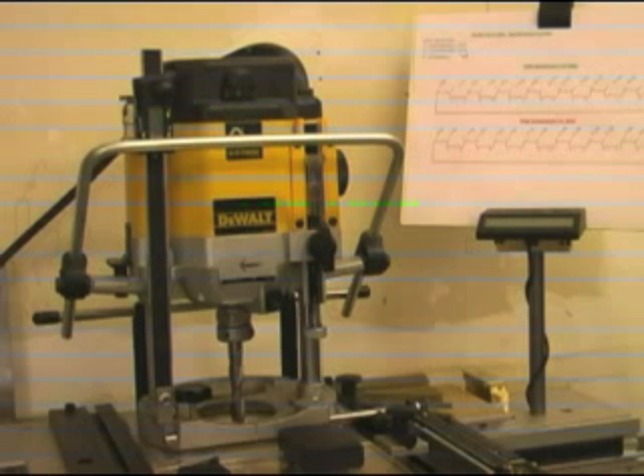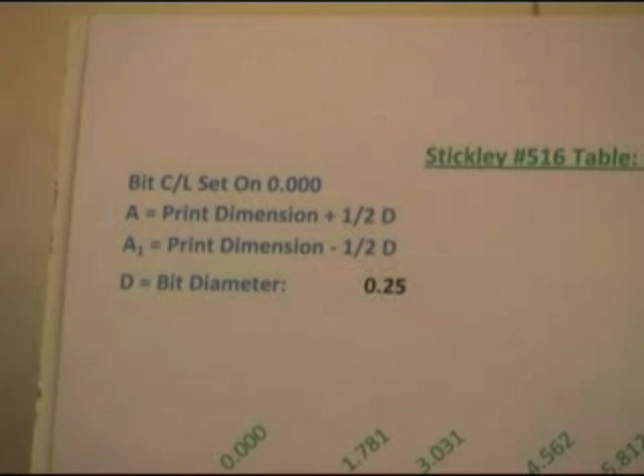Well, as you can see, I've modified my router boss. I've raised the DRO up to my eye level, and I've made a place for a homemade clipboard to set. My plan has two sections, a green section which is my DRO measurements and a red section which are my print measurements. I'm mostly interested in the green DRO dimensions when I'm cutting my mortises.

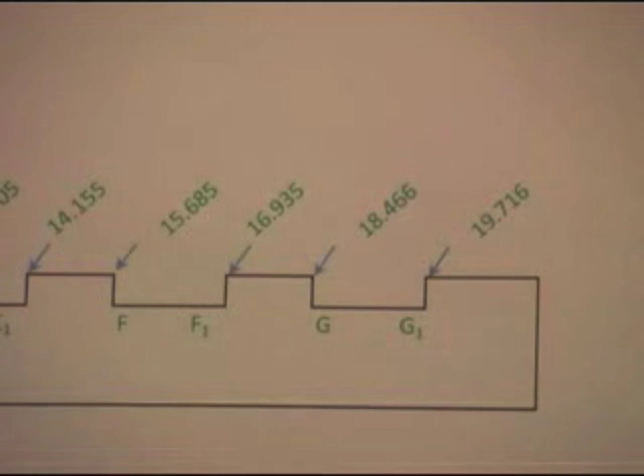If I want to check that they're in the right place, I'll verify them against the red dimensions. As you can see from the upper print here, the mortise that begins at letter F starts at 15.685 on the DRO and ends at 16.935 at F sub 1. That's what I'll use to cut my mortise. I can verify it then with my print dimensions and see whether or not I actually have the mortise in the place that the print calls for.

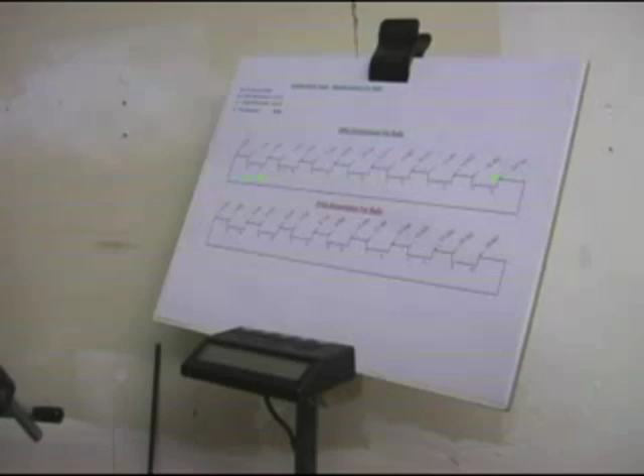So now that I'm all set up, we're going to talk a little bit about mounting the work to the router boss. As you can see here, we're looking at the mortise table, and the clamp is partially disassembled because I want to show you that I use a star washer, one of those jagged little washers, between my knob and the aluminum clamp. What that does is prevent slippage when I lock it down.

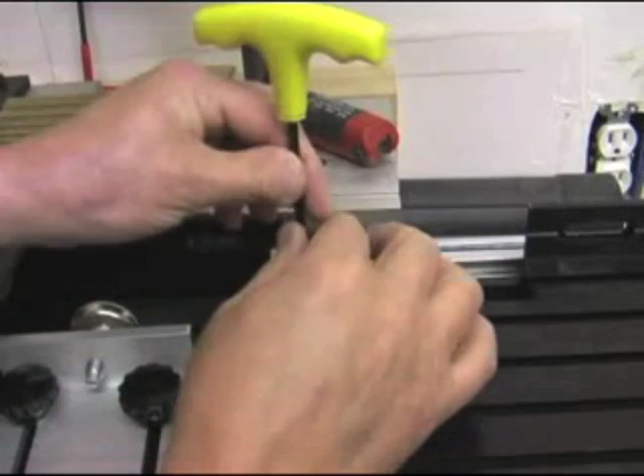Now I've also got the shop-made stop that I showed you in the tenoning video, and I'm going to use it to provide a stop for the rail that I'm going to be cutting mortises in. I've set the stop so that it's going to position the workpiece where there's a solid spine behind it. I don't want to put it over the open area and clamp it there because I'd be pushing against empty space. So I can slide my rail in, as you see, and it will bump quite securely against my stop.

Again, the back rail gives full support to it when I push my aluminum clamp up and put pressure against it. So I'll orient this so that it's somewhere towards this end of the rail, and then I'm going to lock those knobs down, and the little star washer that I showed you is going to keep it from slipping now that I'm going to put a screwdriver on that clamp and apply a little pressure. If that weren't there, you'd probably notice that your clamp will slip and slide backwards. The star washer is going to prevent that.

So I've got the rail in there and I'm holding it down in place and screwing the clamp securely. Now I'm going to traverse the mortise table so that I can access the clamp on the other end of my rail and secure it in a similar fashion to what I did on this end. So once I get it to where it's clear, I'll hold the work in place again, and then having screwed down the clamp tightly with my knobs, I'm going to use my screwdriver to clamp the workpiece down at this end. Again, it's against the solid spine and it's going to be securely held.

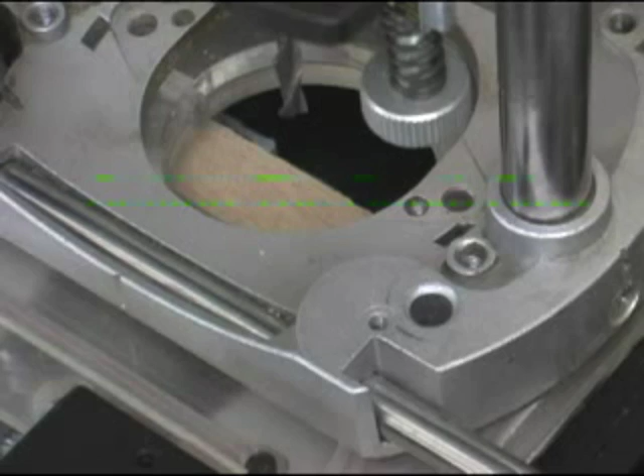This is showing us how we're going to set the depth stop. There are numerous ways to do this, and I'm going to show you how I do it just using simple gauge blocks. I find that very quick. So I'll bring the router bit down to the top surface of my workpiece, and then I'm going to bring the depth stop down to whatever series of gauge blocks I decide to use. In this case, my mortise is 5/8 of an inch deep, so I'm using 5/8 inch combination gauge blocks, and I'm locking my depth stop to that.

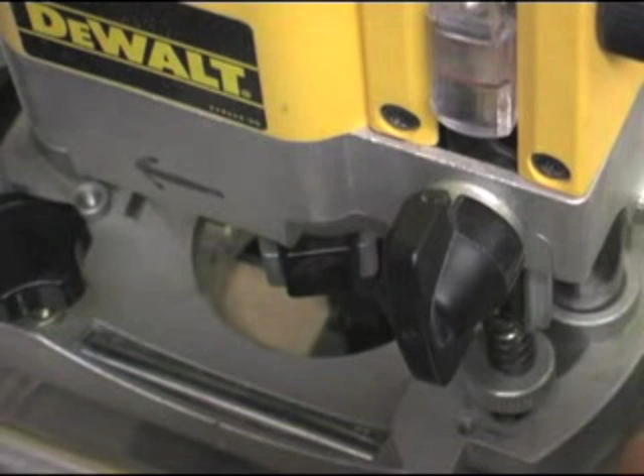Okay, let's go ahead and proceed to zeroing the x-axis. What that means is I'm going to plunge my router bit down and move the work surface, the leading edge there, into my router bit and get a reference. Then I'm going to set my DRO to 0 and follow that by moving the mortise table 1/8 of an inch. My bit's 1/4 of an inch, so by moving the table 1/8 of an inch, I am theoretically going to have the center line of my bit lined right up with the edge of my workpiece.

You may choose to do this differently, and however you do it, this will just give you a starting point or an idea of how I do it. This isn't the only way to do this. You may like the leading edge of your bit or the trailing edge of your bit or any other way.

Now I'm just going to plunge the bit and see that I've got what appears to be the center line of my bit on the leading edge of the workpiece.

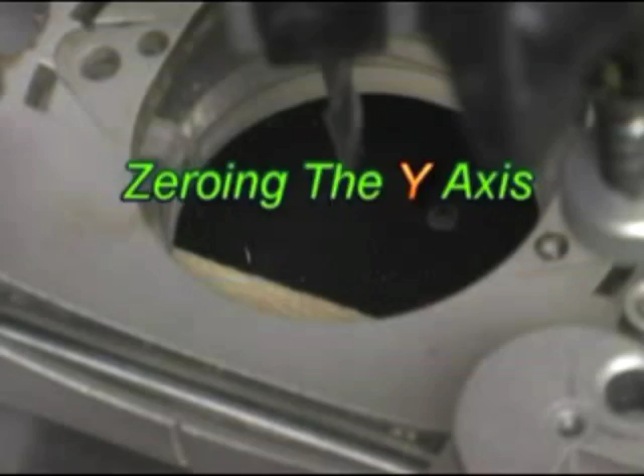Let's proceed to zeroing the y-axis now. That's the in and out, or the north-south axis. What we're going to do is plunge the router bit behind the workpiece, touch the back face of the workpiece, and get a reference point, and then that will be the 0 setting on the DRO.

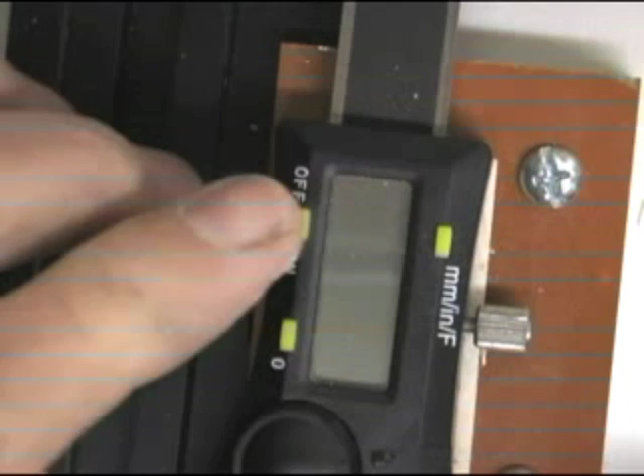The next thing you're going to do is pull the router boss towards you, whatever distance your print calls for. Mine wants 1/8 of an inch of a wall between the edge of my mortise and the outside edge of the workpiece. So my bit is a 1/4 inch plus the 1/8 inch of the wall. That means I'm going to set my DRO to 3/8 of an inch. I'm going to pull the router towards me until I read 3/8 of an inch, and then I'm going to lock the router down so that it can't move from that setting.

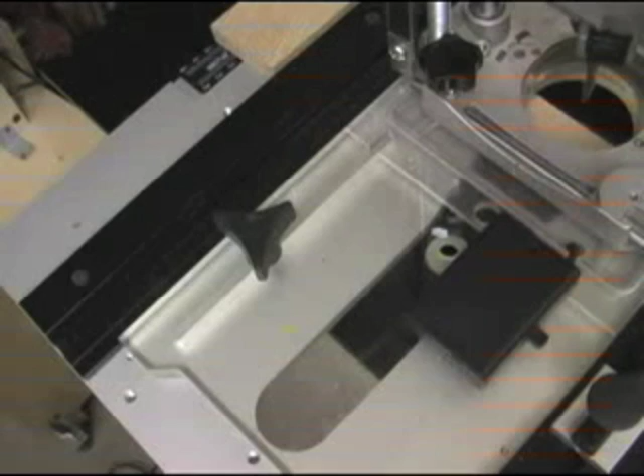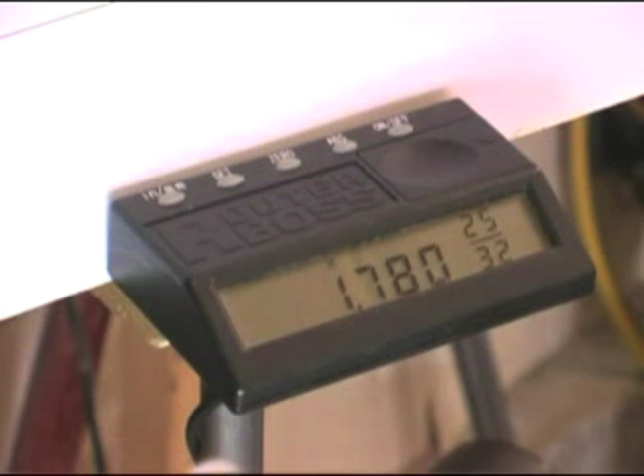Okay, it's fun time again. It's time to make some chips fly, so let's cut the mortise. What I've done is I've traversed the workpiece until my DRO gives me a reading of 1.780. That's where I'm going to start my first cut. I'm using the 1/4 inch upcut spiral bit from Craftsman Gallery. It's an excellent bit and it gives very clean cuts.

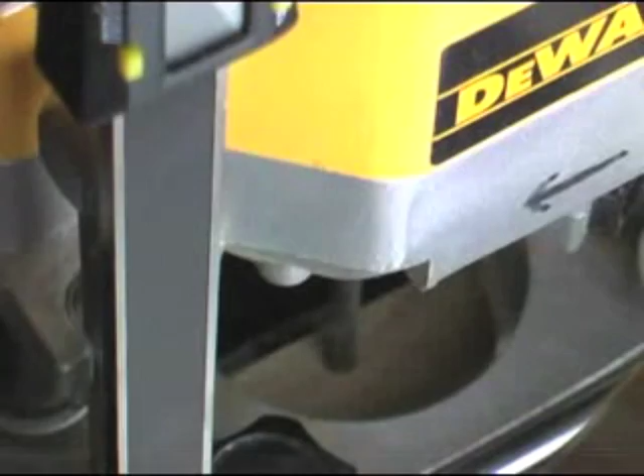I'm going to go ahead and plunge my first cut in a series of 3 or 4 easy plunges so as not to stress either the bit or the workpiece. Once I've reached the full depth, and I'll know that because my stop on the router will not let me go any deeper, I'm at full depth, then what I'll do is release the plunge bar and traverse the workpiece

until I come to the second dimension that my print calls for. As soon as I hit that on the DRO, I'm going to go ahead and make another series of 3 or 4 easy plunges and go to full depth again.

Now it's just a simple matter of approximating 1/8 to a 3/16 of an inch depth, and then doing seesaw or back and forth cuts from left to right and right to left, removing a small amount of waste at each cut. With a 1/4 inch bit, I would never attempt to cut that entire mortise in one pass. I think you'll regret it if you do.

So with some easy cuts, it only takes about 30 seconds, and I've got a mortise that's completely routed. If you notice, the sidewalls are very clean. That's going to be a nice glue surface. It's a very precisely cut mortise that you don't have to be ashamed of.

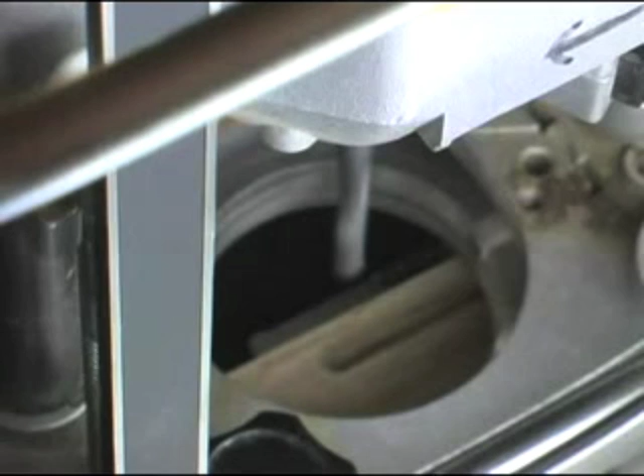Now that I've turned the router off, we can take a peek at that mortise and see what it looks like, and I think you'll be very pleased with it. It's not something you're going to have to hide and quickly cover up.

Well, there you are. Nice clean mortise with clean sidewalls that'll give a good strong glue joint for the tenon.

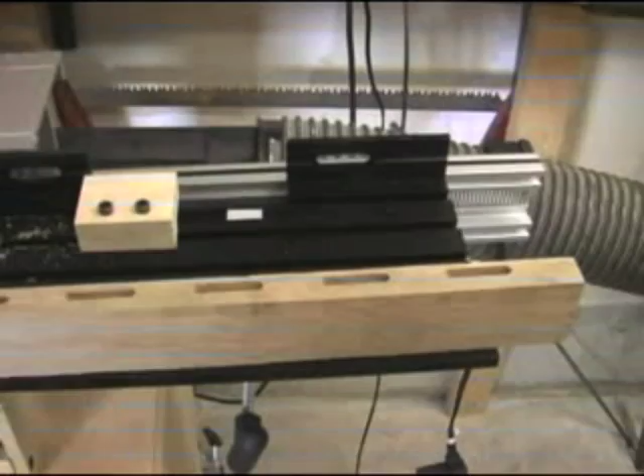So I'm going to go ahead and cut the rest of those joints, and that'll take just a minute to do. Here they are, I've removed them from the router boss. You can see all 7 of those mortises spaced very precisely with nice clean sidewalls, no blowouts on that inner 1/8 inch sidewall.